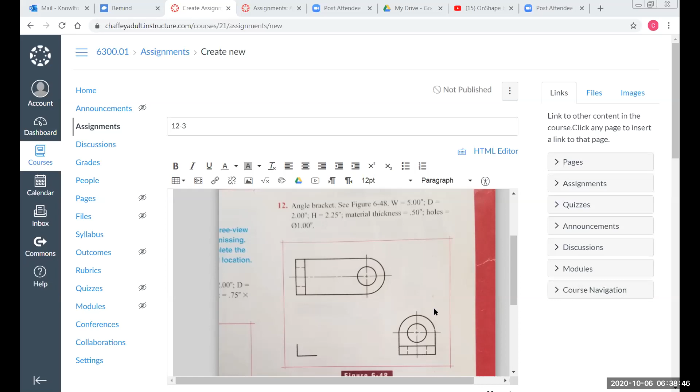The depth, which I would call the width, is 2 inches, meaning this outside arc here is a diameter of 2 inches. It says that the entire height is 2.25 inches. And there are some 1-inch diameter holes that are drilled in the bottom and on the top. So when we put this information into our isometric view in AutoCAD, we'll just have to remember that it's going to look like an L bracket with a rounded top and with a rounded bottom.

So we're working on drawing 12-3, so make sure that you change your drawing number to 12-3. Also remember to change your snap settings to our isometric snap. And we're going to turn our mouse using the F5 function key to the top plane, because we're going to start with the circle on top of the bottom portion of it. And if you recall, it's a 2-inch diameter.

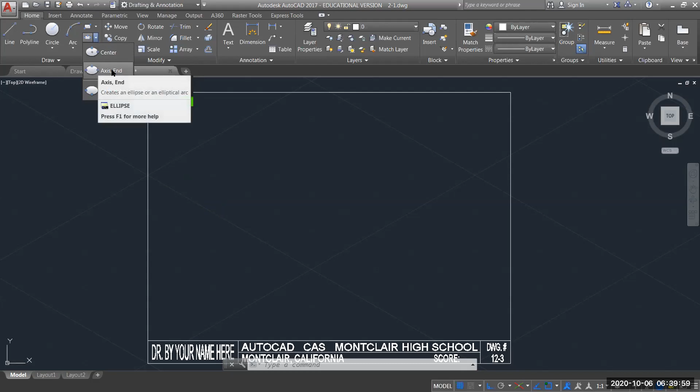And to draw circles in isometrics, we actually don't use circles. We use an ellipse. So I'm going to go axis end. And I'm going to create an iso circle, an isometric circle. So I need to make sure I click on that. And it's a diameter of 2 inches. So I'm going to make sure I click on diameter down here so I can put in a proper measurement. 2, enter.

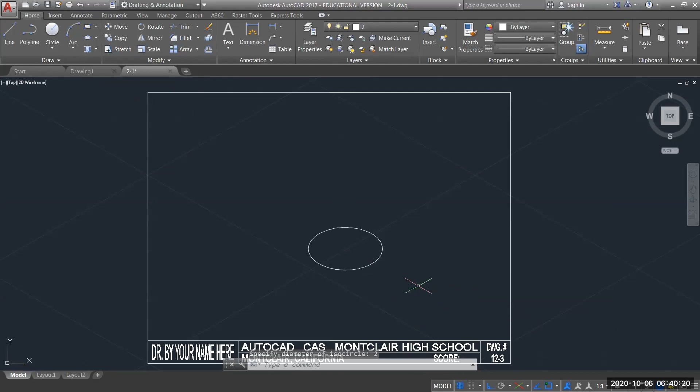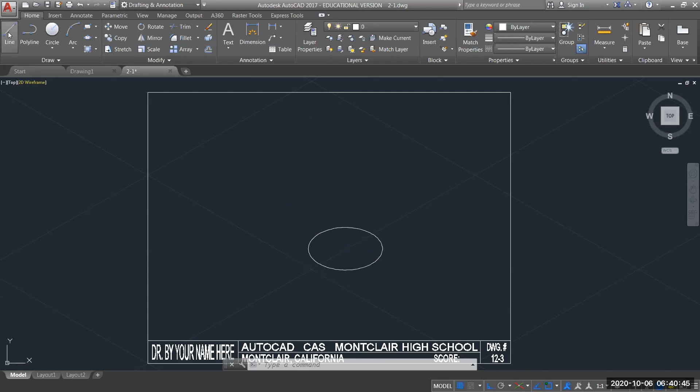And let's see, if we recall, the entire length was 5 inches. And we said from the center of this going back is going to be 4 inches. But because there's a thickness of our back that's 1/2 inch, we're going to subtract even more. So what I'm actually going to do is go from the center of this back this direction 3.5 inches.

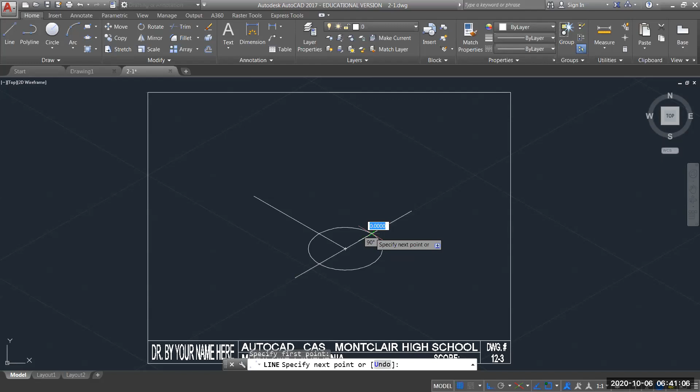And I'm going to draw out some reference lines straight out this way and straight out this way, because where that intersection is, I want to go back 3.5 inches here and from this intersection also. And I'm actually going to connect those. This is going to be the front edge of our back portion of the L bracket. And so my center point, I'm going to take straight up so that I have a center point for this top section.

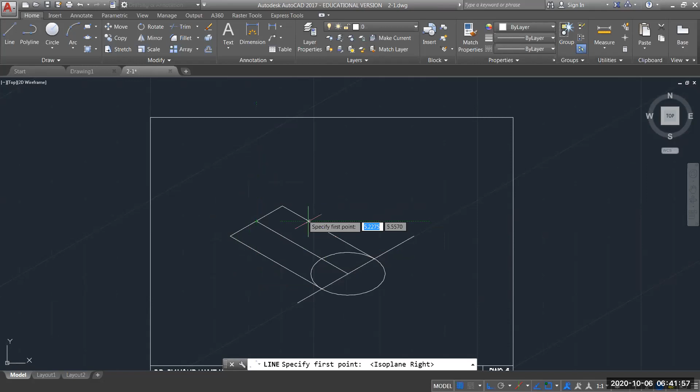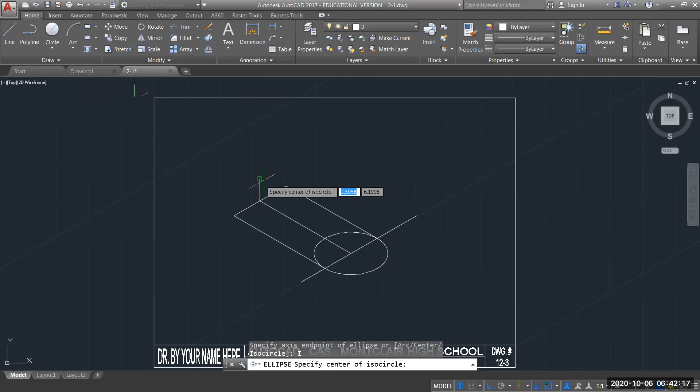Now, the entire height of this thing is 2.25, and I'm using a 2-inch diameter. And the thickness is 0.5, so if I take 2.25 minus the 1 inch for the radius, that would be 1.25, minus the thickness of the material, that's 0.75. So from the end point of this line, I'm going to go straight up 0.75, and that's going to be the center of my arc going this way. So I'm going to draw, using that center point, another isometric circle. Axis end, isometric circle from the end point here with a diameter of 2.

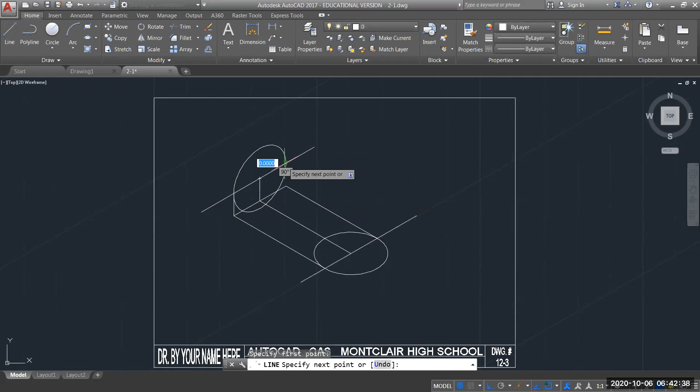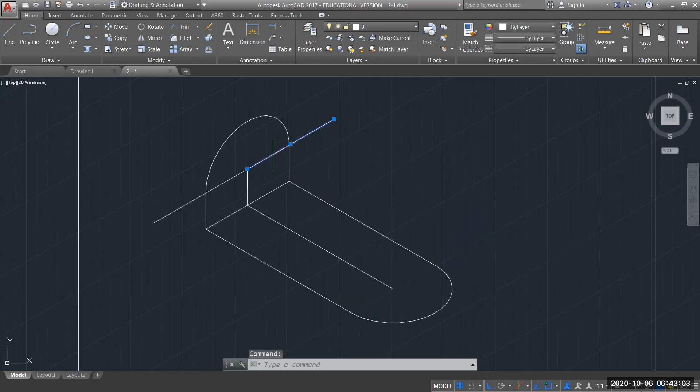And I'm going to draw a reference line straight out this direction in both directions like this. And from this intersection here, I should be able to drop a line straight down and have it connect with my corner. Now I don't need the bottom half of this, and I don't need the inside half of this, so I'm just going to trim those off right now so I don't get them confused with anything else. And I guess I really don't need these either. I can delete these out. I'm going to keep my center points because I still have a hole to drill in here.

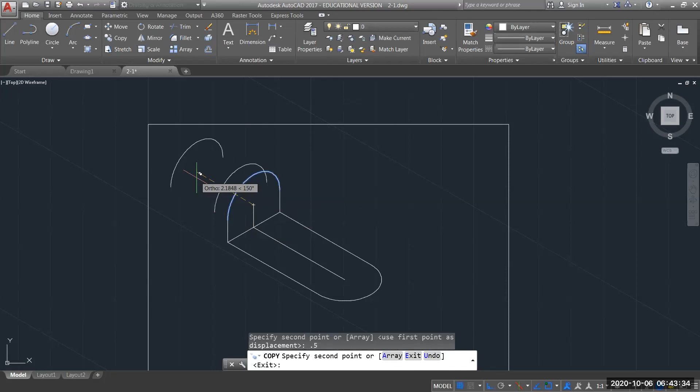But what I am going to do is take this arc and copy it. If I hit F5, I'm going to copy it back this direction, the thickness of my material. And the thickness is 1/2 inch. So I'm going to go copy this, enter, grab it right at the midpoint, pull it this direction, and type in 0.5, enter, and then enter again. And I should be able to draw from my quadrant point to quadrant point this top edge. And if you don't have quadrant turned on, make sure that you turn on quadrant in your OSNAP settings.

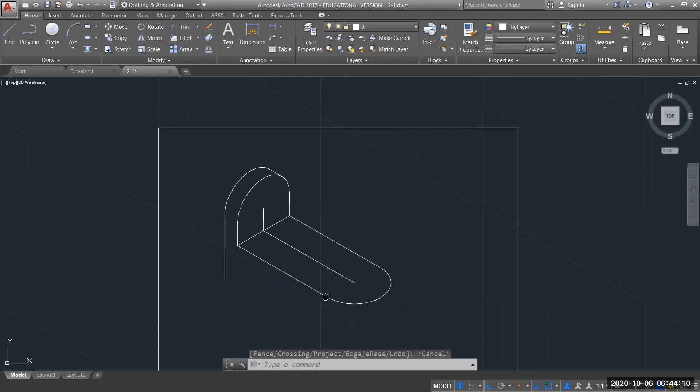And I'm going to draw a line from here to here. And I'm going to go from here straight down. And I'm going to trim off that inside piece here that I don't need, this and this. Nice. Notice I drew this way too long, but that's okay. I'm going to trim it off in a minute anyways. And I'm going to do the same thing for this arc. I'm going to copy this, enter, grab it at its middle, point it down, type 0.5, enter, enter again, and then draw in a line from quadrant point to quadrant point there. And I'm going to trim this piece as well.

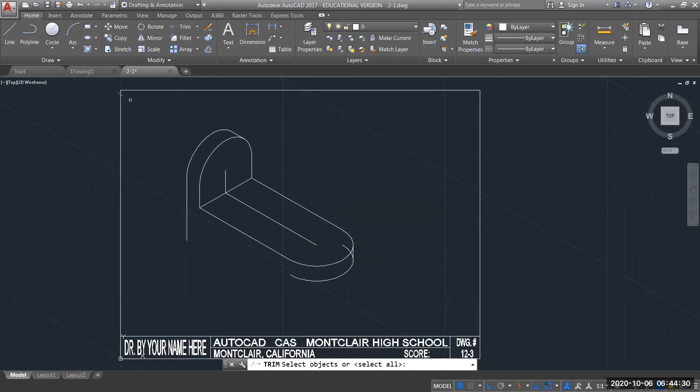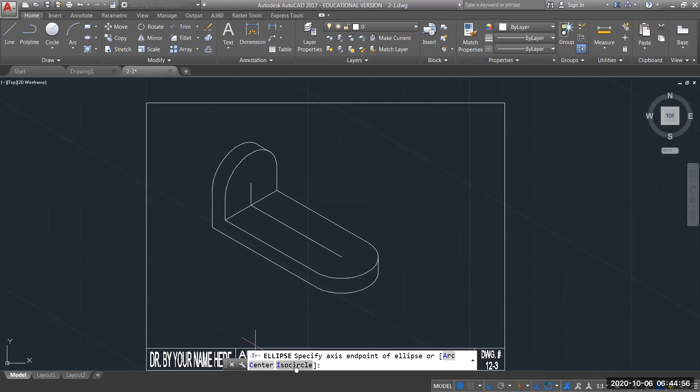Good. Now I should be able to just draw a line from the end point of this arc straight back and then trim these pieces off. And there's the general shape of my piece. I just need to drill my 2 holes now using the same center points. So let me get my ellipse, axis end, ISO circle, F5, start it here. This one is a diameter, so I click on diameter of 1. And I'm going to do the same thing. ISO circle, F5, whoops, ISO circle, start it at the center point. It's a diameter of 1.

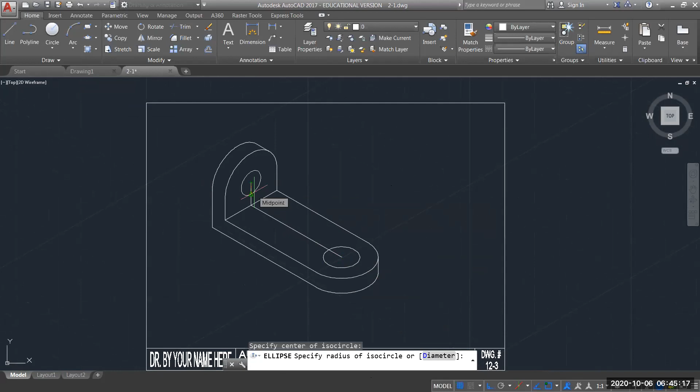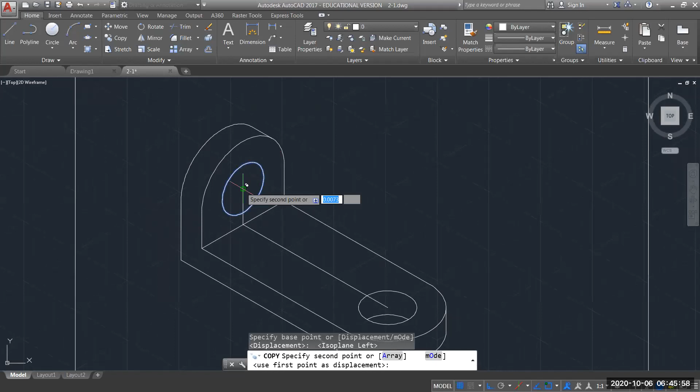Now I think I may be able to see the inside edge of my arc here and here. So let's check this out. If I copy this circle, starting at the center point, and drop it down equal to the thickness of my material, which is 0.5, yep, I'm going to see the inside edge. So I need to trim this, this, and this. And I'm going to do the same thing back here. I'm going to go copy this, F5, so I can go in the right direction. From here, back this direction, 0.5, and then trim this, this, and this. I can get rid of my 2 center points.

And there's my finished product of drawing 12-3. Hopefully that was helpful.